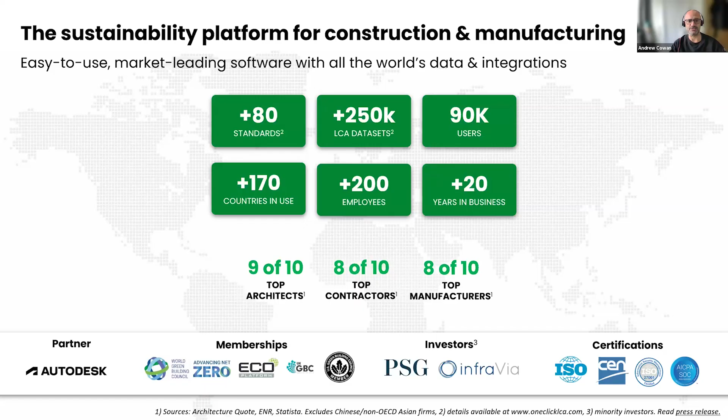agriculture, construction, and manufacturing. And UN data indicates that the Earth's average temperature is projected to rise by up to 3 degrees Celsius by the end of the century, and that's if we continue on our current path. So if we don't take action to reduce these greenhouse gas emissions, like carbon, for example, the impacts of climate change are going to become more severe and, more importantly, irreversible.

So our mandate as an industry has to be to decarbonise construction and manufacturing. I don't think this is any major secret now, but the built environment accounts for around 40% of global carbon emissions. So understanding and managing embodied carbon, which is the carbon footprint of materials and construction processes, is critical to achieving the net zero targets that we're all aiming for.

So for those of you that may not even know what embodied carbon is, embodied carbon encompasses all emissions before a building becomes operational throughout its life cycle, from cradle to grave. Stored carbon, on the other hand, represents carbon locked away in natural materials, offering a form of temporary sequestration.

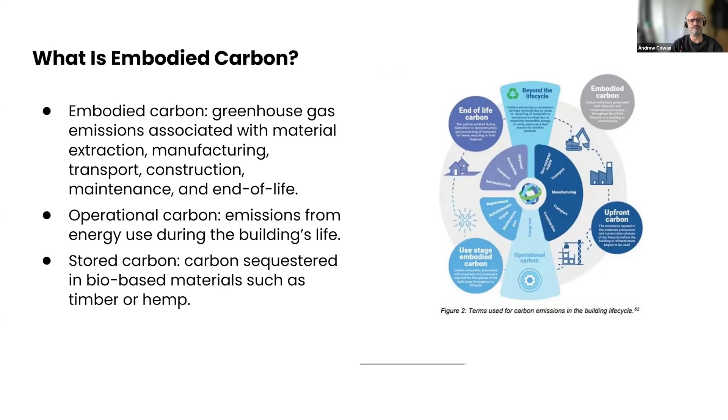Now, the RICS Professional Standard version 2 establishes a unified methodology for assessing whole life carbon across buildings. It introduces enhanced clarity on biogenic carbon accounting, that is, measuring carbon stored in materials, and emphasizes transparency and consistency across all project stages. If you've never seen a life cycle assessment before, if we were to visualize it, this is probably what it looks like.

You might be getting asked to do this by your own customers, and that could be for compliance reasons, or you just have your own sustainability goals or strategy that you're looking to achieve, and this is what it might visually look like for you. So it's a very standardized process which follows a number of ISO and EN standards that you can see here.

And under RICS version 2, measurement spans across 4 main modules, and you can see 3 of those here. So we have A1 to A5, which is your products and construction stages, B1 to B7, which is your use stage, so maintenance, repair, energy, water, that kind of stuff. C1 to C4, which is your end of life, deconstruction, waste, processing and disposal.

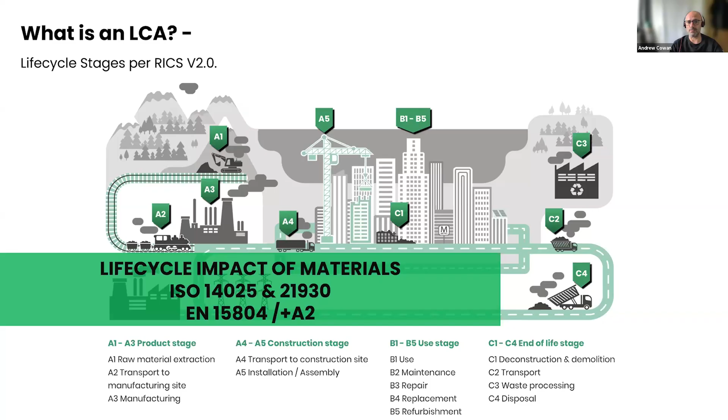And then the one that you can't see here is D, which is beyond the system boundary. So we don't normally go as far as that, but life cycle assessments can do that. And that's focused on reuse, recovery and recycling benefits. So the ISOs really are the baseline life cycle assessments, and the EN numbers, so EN 15978 specifically focuses on buildings, and then EN 15804 is for building products. So that's basically the gold standard LCA, and you might know that as an environmental product declaration, or somebody's asked you for an EPD.

So stored carbon must be accounted for transparently. RICS version 2 specifies that carbon stored in materials such as timber is included in early life cycle stages, but released at end of life when the carbon returns to the atmosphere. So this just ensures that biogenic storage is not double counted as a permanent reduction, but recognized as part of a dynamic carbon balance.

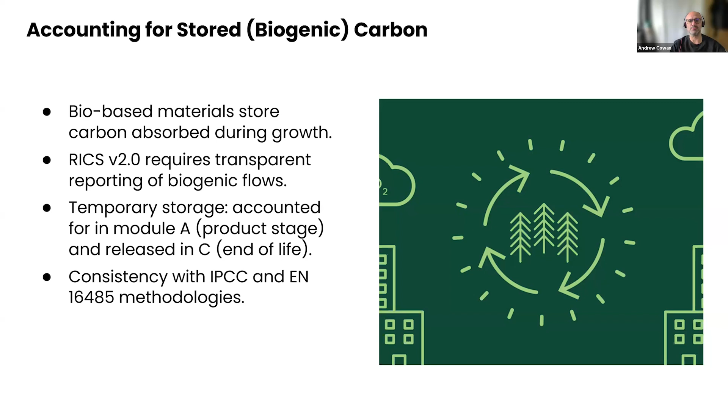At One Click, what we do is simplify that compliance with RICS version 2 by providing a validated automated platform to measure both embodied and stored carbon. Our software connects directly with EPD databases, ensuring that you get high quality, transparent data for all materials and processes. And it helps people that are using us at the moment visualize impacts across the life cycle.

We have built-in benchmarking, so project teams can compare performance, identify hotspots, and make low carbon design decisions early in the process. You might recognize in the middle section there, so RICS is obviously in there, but BREEAM might be something that you may be needing to attain, or you want to get into a project that has BREEAM levels, or if you're doing infrastructure, PAS 2080, and we cover all of those.

So what does that look like? Well, if you're building an LCA, specifically in our tool, it might look something like this. So hopefully you can see this video moving. I'm not going to build an entire LCA for you because we'll be here for longer than the 10 minutes

that I've got. But I've got a project here that we've got 3 different options for, and 3 different versions of the building. And what we're doing is we're just going to add a product into something that's already been built out, just to see what that looks like. And that in turn, we then report on to RICS or into a BREEAM assessment, for example.

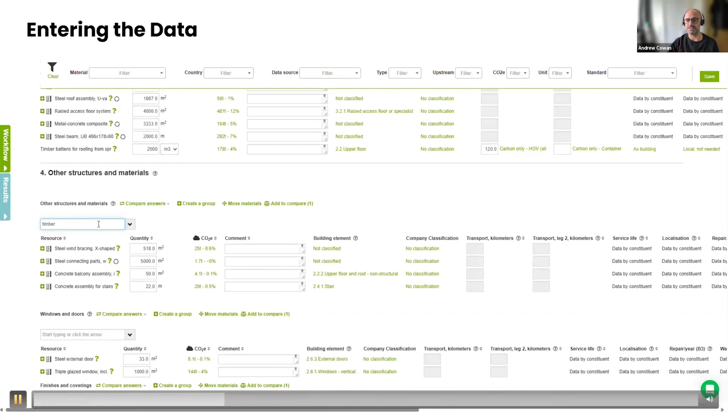So you can see here we're entering a timber product, and we're going to choose a timber product from our materials compass, which is the data we have, so over 250,000 data sets. And you can see here we're picking something that's local, so it picks something that's local to you. Of course, we're in the UK, and then we're going to enter the amount into this life cycle assessment.

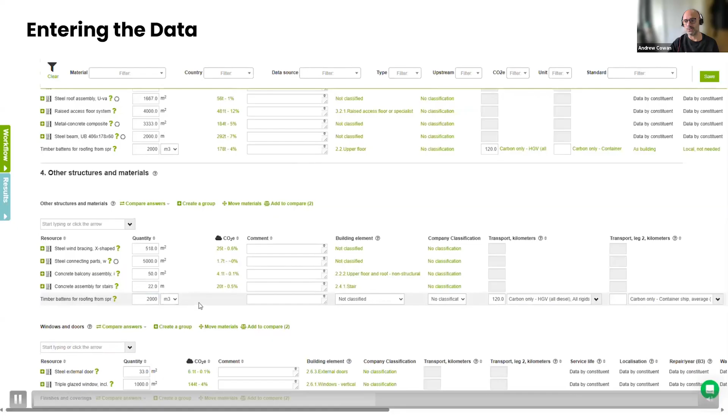What's cool about this is that you're able to then click on the little question mark and it'll bring up the details of the product that you've actually put in there. So this is a real product, Jordeson Timber. If anyone's here from Jordeson, congratulations. So a bit of free advertising for you, but you can see here, this is an EPD. So it's an EN 15804 plus A2. And you can see all the relevant data on the screen in front of you.

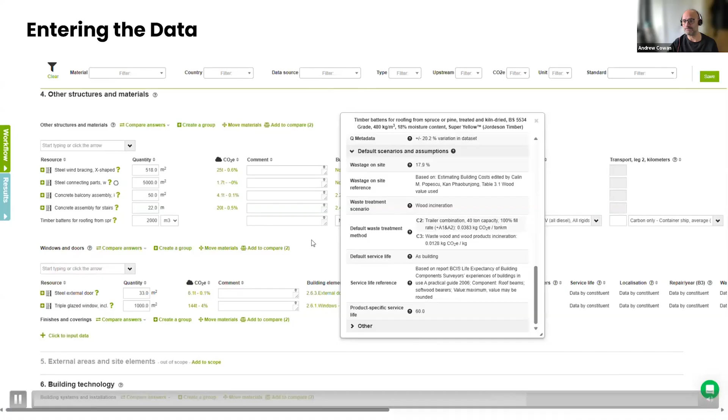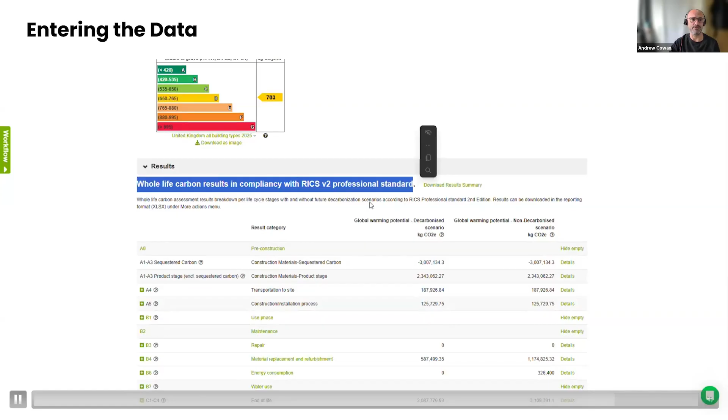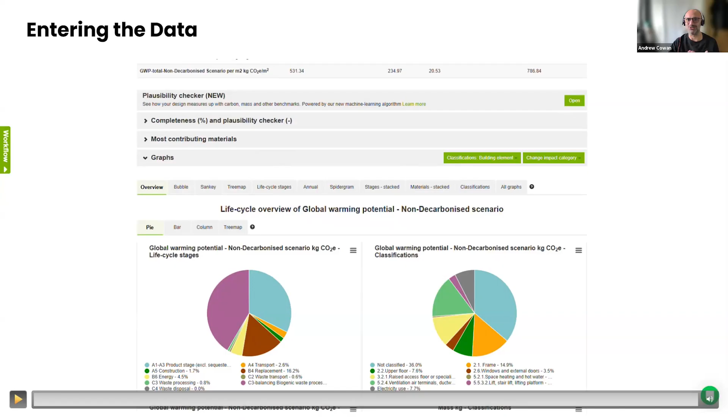You can also compare products against each other. And then the key here is that you want your results to then put through to your RICS version 2 assessment. So now you can see the results. So this one's specifically for a RICS version 2 professional standard. And again, if you scroll down a little bit here, you'll be able to see some of the reporting. I'm going to show you a little bit more about that very shortly. But really, it's as simple as that to enter your products onto the tool. And ultimately, we'll start to look at what the reporting actually looks like towards the end of this presentation.

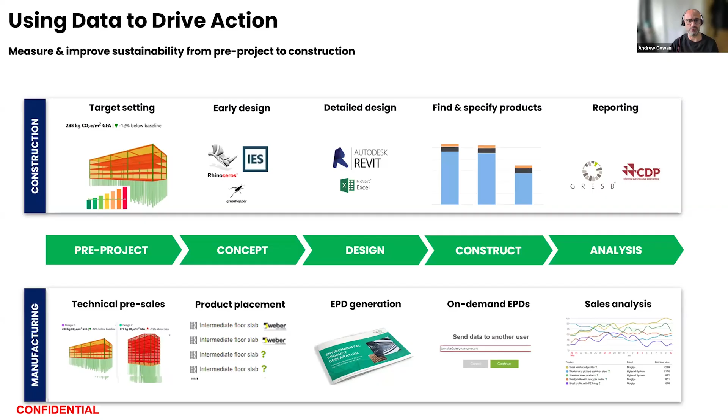But the goal isn't just about compliance, right? So it's about informed decision making as well. So of course, using something like RICS and RICS aligned methodologies with something like OneClick, project teams identify material substitutions and design efficiencies, and they get to reuse opportunities that cut embodied carbon before construction even begins. So early design decisions have the highest impact on embodied carbon. And when you start to bring together digital tools and the RICS alignment, you get these actionable insights. And of course, then you can also comply with things like LETI, the GLA requirements, and also UK GBC frameworks.

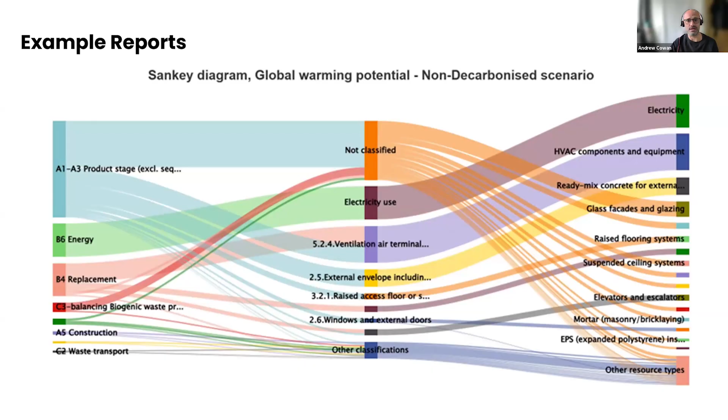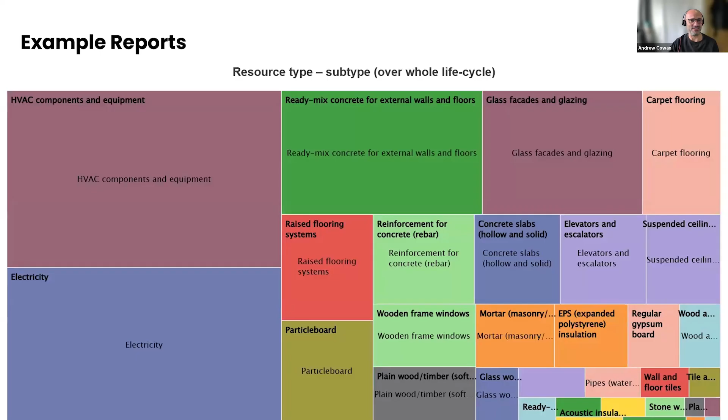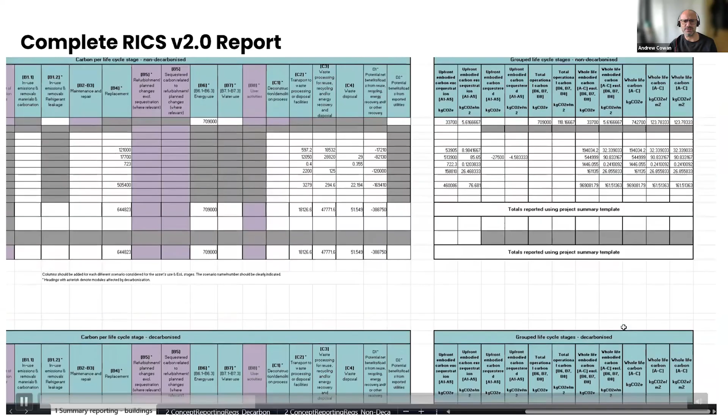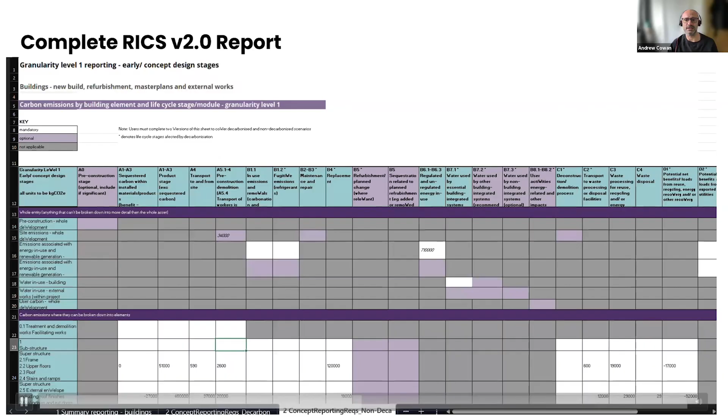So this is what a finished RICS version 2 report would look like. So once you're happy with your life cycle, your project, or your building, it'll produce this at the click of a button. So here you can see the life cycle stages A1 to A5, and of course there's the C1 to C3 for reuse in there as well. There's a few tabs here, I think may have been cut off by the video, but essentially this report is generated quickly in the format expected for your reporting, and it's quick and easy to complete your assessment and add it to your evidence at whatever stage you are of the project.

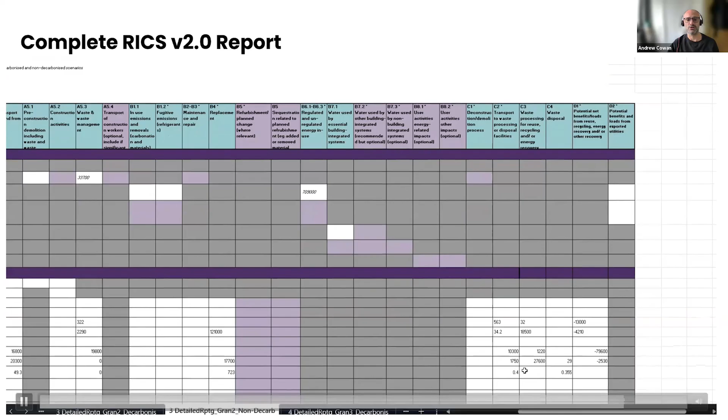So I don't want to take too much time. So just to summarize, measuring embodied carbon and stored carbon under RICS version 2 offers a consistent foundation for low carbon design. And what we do is we just turn that methodology into action. So we're enabling designers, developers, and contractors to quantify, compare, and cut carbon emissions effectively through some of the outputs that you've been able to see here today.

As Charlie mentioned, TDUK are helping us. They're at the very heart of this, including Charlie himself. Morwenna Spear from Bangor University, who's co-authored the ISO for biogenic stored carbon, is on our writing group, as are our own technical partners at Supply Chain Insights and our own technical internal team. And the Technical Advisory Committee, we've pulled these people together, as you can see below. Some are helping us with resources, which is fantastic. A real shout out to those people listed under that committee.

But what's really interesting there is that we have financial consultants and others from the trading city side of things, the corporate world, the sort of high integrity side, and then, not that they're low integrity, but we have from the supply side, say, the Forestry Commission or Scottish Forestry, but then the tier one contractors.

It's really interesting to see how these people debate how the certification scheme might be structured and how to make it feasible, accessible, totally robust and rigorous, and yet something that can actually valorize units that can then be traded, so that it's not a certification that isn't used, it's a certification that can be applied to all kinds of construction projects, whether they're commercial, residential, and indeed fit out as well.

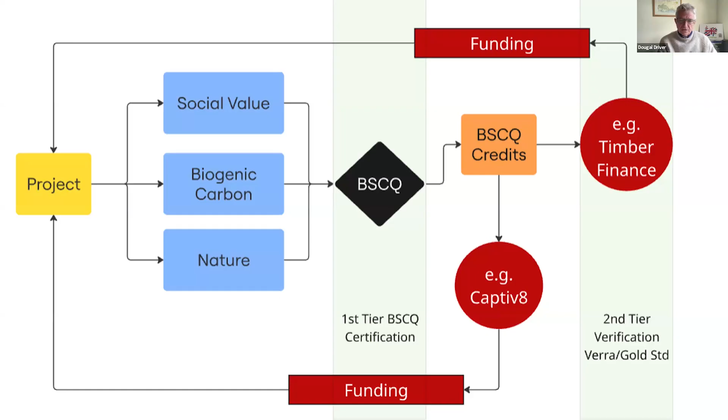Thank you. So as you might know, there are standard 3 tiers within the IPCC greenhouse gas inventory. Tier 1 follows the basic longevity figures from the IPCC, which for construction is 35 years. We truly believe that's underplayed, but of course it's an average. Some timber might be destroyed sooner, some might last longer, so it's a global average.

And tier 2 and tier 3 is where we're going to really focus and add value by providing a certification system whereby the project can measure more accurately and state and claim what it feels the longevity could be through, say, bespoke systems. We know that many construction systems in timber would happily sign off against 80, 100 years, and we want to get that as long as possible. We have no prediction on what that might look like, other than we want to provide a facility whereby projects can push beyond the very cautious, deliberately cautious averages from IPCC.

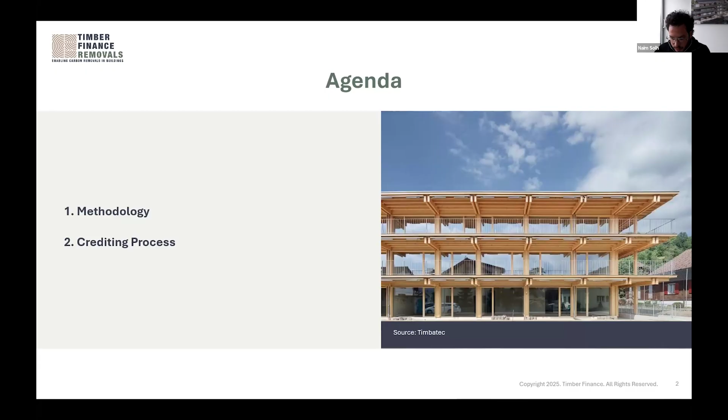Okay. Thanks, Charlie, and thanks to Timber Development UK for the invite. I'm Naim Sol from Timber Finance. That is a company based in Switzerland with the mission of enabling timber buildings into the carbon markets. As Dougal said, there are not so many players in the game at the moment, but there are some, and today we're going to be explaining what's our approach. So I'm going to be talking about the methodology and the crediting process, and how building owners can benefit from the climate benefit of building with timber.

Even initiatives that might look completely independent, such as ICROA or the SBTi, the Science-Based Targets, are rooted somehow in UN structures. This means that demand in carbon markets is not as diverse as in other commodities, and it largely depends on what the UN and its affiliated bodies deem acceptable. So let's talk a bit more in detail about this methodology we are developing. First of all, it's an ICROA endorsed methodology for engineered wood in construction that builds on the established carbon accounting principles while addressing new challenges like long-term storage and risk of reversal in buildings. Those two topics are especially sensitive if you are working in this field.

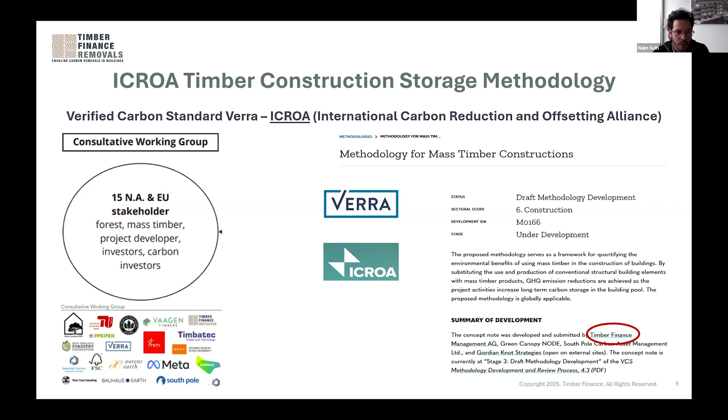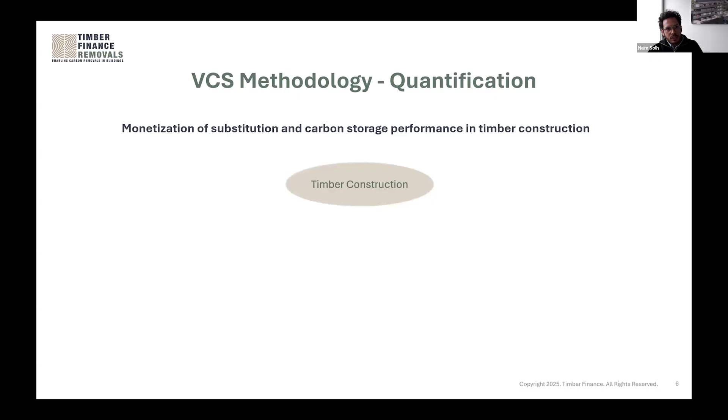From the start, we involved a broad group of stakeholders from carbon markets, academia, forestry, industry, and other players from the built environment. They provided input on key concepts, helped us with technical hurdles and the overall design in order to end up with a robust methodology. Okay, so what are we looking at exactly? What we're quantifying is, on one side, the emission reductions. Those are the avoided emissions when a timber building is compared to a conventional reinforced concrete structure. So we're talking about embodied emissions.

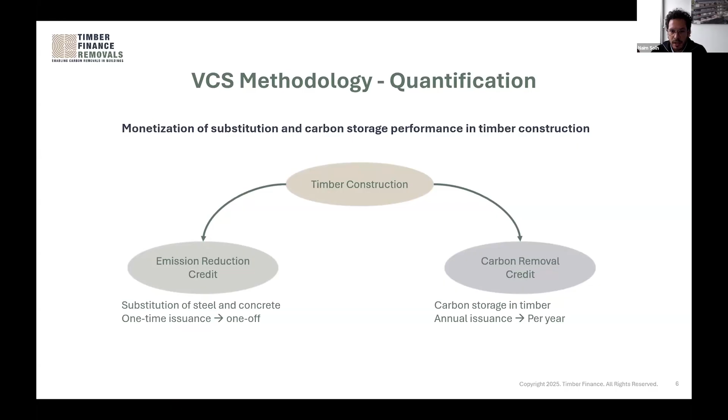And then we're also looking at the carbon removals. That's the biogenic carbon that is stored in timber itself. And it's measured against what would otherwise be stored in baseline wooden products like other wood-based panels, paper, cardboard, sawn wood, energy wood, etc.

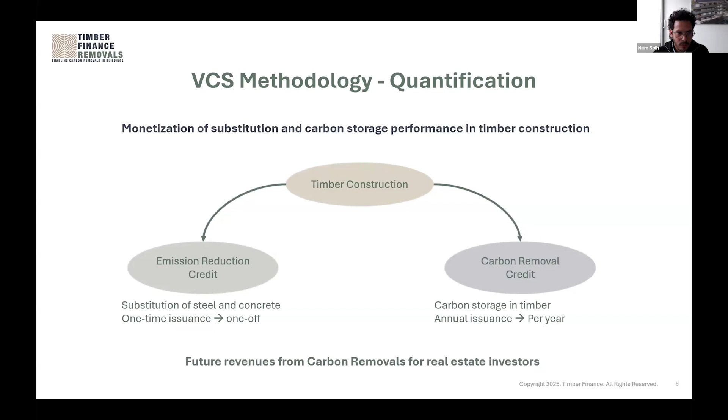Little status update before we continue. Last summer, we submitted a pre-public consultation draft to Verra, the carbon standard we're currently working with, and have received their feedback. And there are still some points we need to refine before the methodology can move forward. Our goal is to complete these revisions by the end of this year, and then launch the public consultation and the validation and verification body review.

If all goes according to the plan, we expect final approval in the second quarter of 2026 and to start certifying projects in the third quarter. Key methodological features. There are five of them, the first one being eligibility.

We only include projects that use wood from sustainable sources, that guarantee long-term storage, that's 100 years for us, and that offer a valid substitution for conventional materials like concrete or steel. We are also setting a minimum threshold of 300 cubic meters of wood per building to ensure material significance.

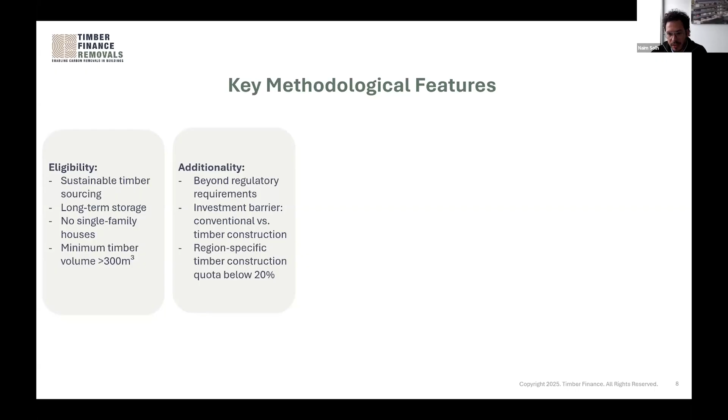Then the second key point would be additionality. The project has to go beyond regulatory requirements, face a clear investment barrier, and remain below. So it has to be located in a place where the timber quota is under 20%.

Then we have to model two baselines, one for emission reductions. That's what we call the mineral twin. That's an equivalent reinforced concrete structure. And then another baseline for the carbon removals, which is the alternative harvested wood products that would have been produced if that wood had been used as something other than an engineered wood product like the CLT or glulam, or just frames for a timber building.

Then the fourth key point would be leakages, that's transport, demand shift and the upstream displacement that we are looking at. And the fifth one would be the monitoring, which would take place at the end of each crediting period. And from our point of view, that's one of the most important things in order to ensure that the storage is still in place.

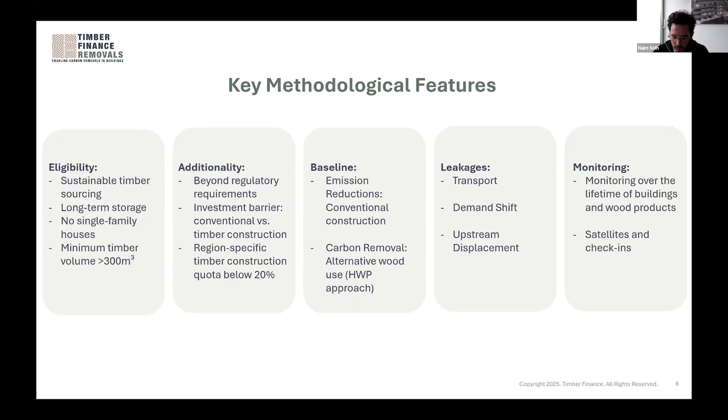Let's move to the second part of the deck. That's the crediting process. Why would real estate developers participate in such an initiative? Well, first of all, carbon credits can provide a financial incentive, helping to offset some of the higher upfront costs of timber construction. Then secondly, verified removals can support a strong sustainability narrative that would allow developers to credibly communicate climate benefits to investors, tenants, and the public.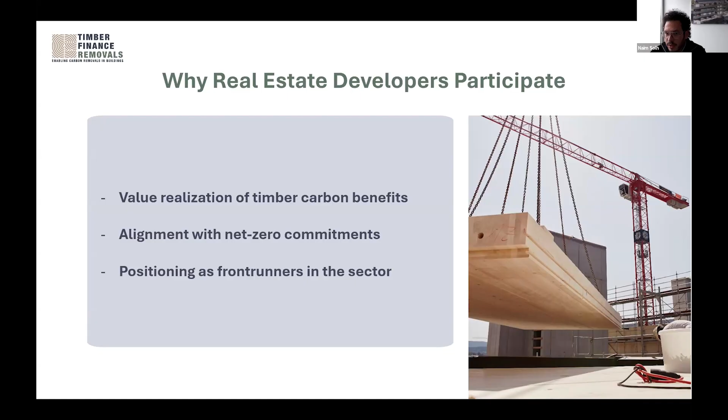And third, it's about strategic positioning and being an early mover, a front runner. It signals innovation and leadership in this ecosystem. Okay, now let's go through project development. I'll explain it in five steps.

So first of all, once the building owner comes to us, we ask for the required data in order to undergo the calculations, the most important documents or files being the delivery slips and a 3D IFC model. Then we analyze the structural elements, identify them, characterize them, and once we have an Excel sheet with all those elements, then we can proceed to the creation of the baseline.

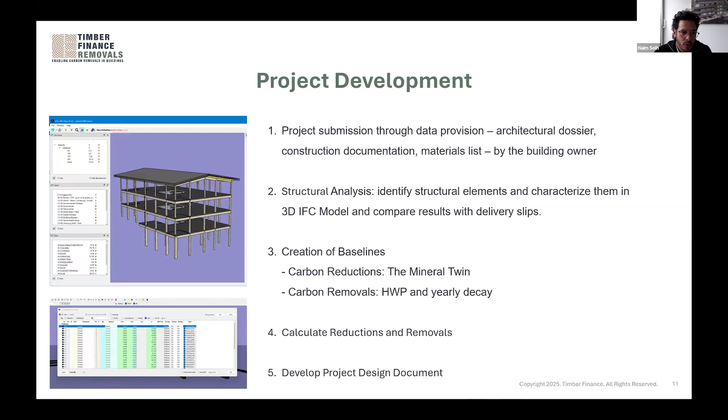So then we can do the translation from timber structure to reinforced concrete structure, and also calculate the harvested wood products for the carbon removals baseline. And the difference between those baselines and the project, taking into consideration the leakages that I mentioned before, would be the final amount of tons that we would be crediting. And once we have that, then we could develop the project design document, the PDD.

Very fast, the crediting process. The building owner, that's our business model. The building owner would come to us. We would develop the PDD, send it to a third-party auditor that is verified by the carbon standard, in this case Verra. They would validate the PDD. The carbon standard would register it in their archives.

And then South Pole, our partner, the carbon broker, would generate the verified carbon units and find a buyer in the voluntary carbon market. With the revenues from those credits, we would share them between the building owner, who would be taking most of it, and then another part, around 30%, 35%, would be split between the forester and the project developers. The fact that the forester gets a part of this income is a unique value proposition from Timber Finance, and it's a way we have to support the forestry sector.